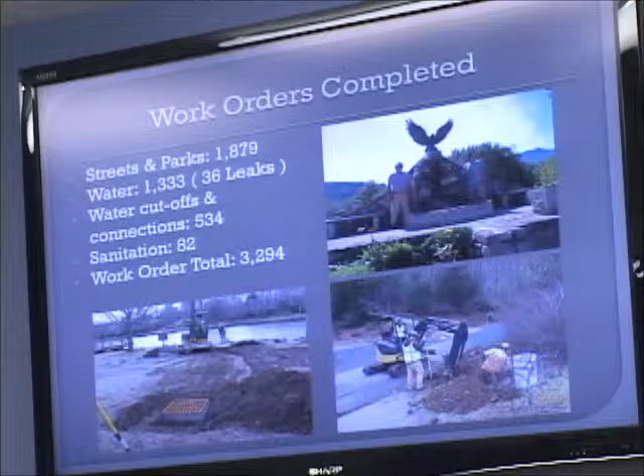Next is the Public Services Department report from Jamie Matthews. Evening, Mayor and Board. I'd just like to say our department had a very busy last 8 months, leading out of summertime, going into fall and winter. Our work orders completed: Streets and Parks completed 1,879 work orders for the past 8 months. Water was 1,333 with 36 leaks. Our cutoffs and connections was 534, sanitation 82, and our work order total for the 8 months was 3,294.

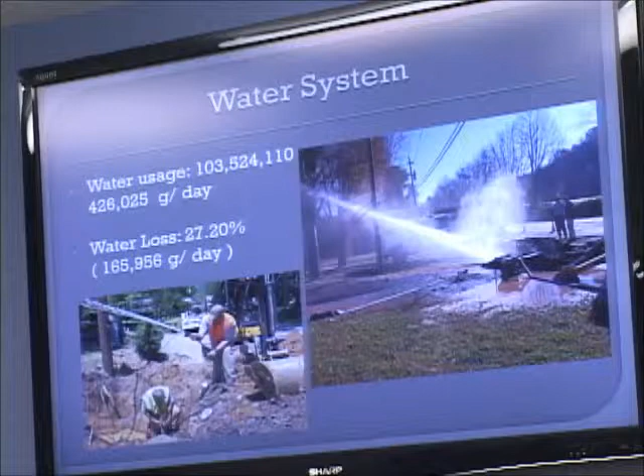Our water system usage: we used a little over 103 million gallons, being 426,000 gallons a day. Our water loss is a little over 27% at 166,000 gallons a day. On our water system projects, our GIS/GPS mapping, we've got the water lines complete, hydrants complete, valves complete, and we're 890 complete into 3,300 meters at this point. Our Hemphill water tank refurbishment, that was completed. I'd like to thank Southern Corrosion, Mark White, for taking care of that.

Also, we had Liquid Engineering come in and inspect all the tanks for this year, and they all turned out really good. No defects, anything like that. So it'll be about 6 to 8 years before we have to do that again on our refurbishment, and probably the next 3-4 years on inspections again. So we're good there. Carolina Heights water pressure assessment, that's moving along really good. We're actually going to start doing some digging within the next week or so, and try to have something done by about June. We got the permits and the okay back from the state on that.

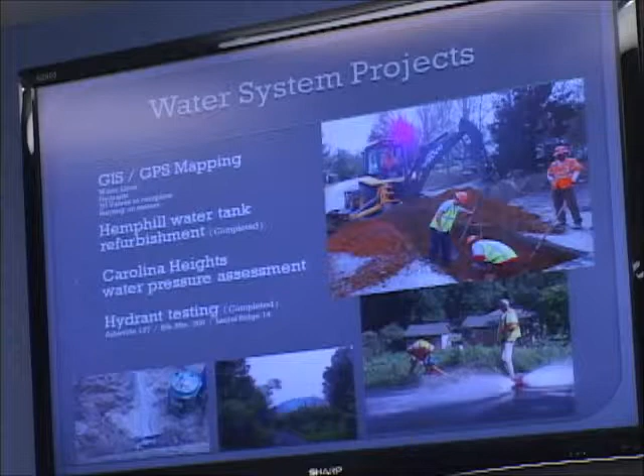We're going to do part of the work in-house and try to bid out what we can't do, which would be installing 2 hydrants and some release valves, and do some work on North Fork and Holly Avenue, put two 6-inch isolating valves in, things of that nature. So we're really looking good there. We hope that turns out good. Our hydrant testing we got completed. We did 137 in Asheville, 306 in Black Mountain, 14 in Laurel Ridge. Got that completed within those months.

On our infrastructure... Let me just interrupt if you would, and just try to explain to the folks what this Carolina Heights water pressure assessment is about, what it's trying to do and in which area of town. Obviously Carolina Heights, right, but that area that is north and west of the Montreat Road. Exactly. There's actually low pressure in that area, and it's been that way for years, and it really needed to be addressed. And we're hoping with the engineering we got and the staff we got that it is going to boost pressure to at least 600 residents.

And so we've already sent the letters out telling them if they need pressure reducers, things of that nature, they need to go ahead and get those installed. So it'll really be a big help, and it's really been a problem area, so it should help at least 500 to 600 people.

On our infrastructure projects and activities, what I did, I broke the town down into 6 zones, sort of like the way we push snow. And the goal is in the next 6 years to complete a lot of stormwater and ditching problems in town. We started on zone 1, and I'm glad to say it is already complete. Not only did the guys get the stormwater ditching, but we went ahead and trimmed the right-of-ways while we were in that zone. So that's complete. We'll start on zone 2. On storm drain repairs and replacement, we had several of them. We had several culvert replacements: Julian Drive, Gatchel, Mount Allen Heights.

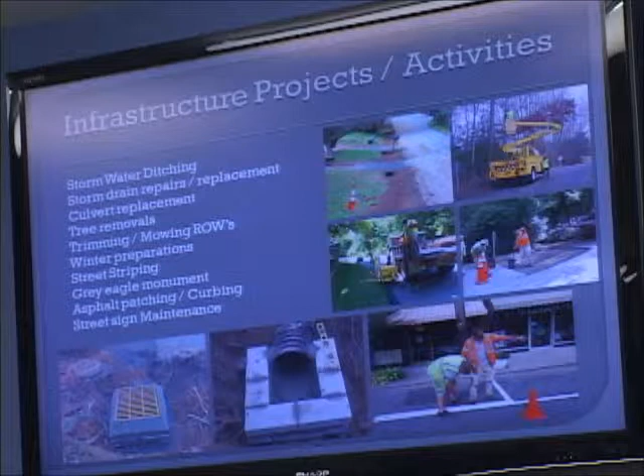Street striping we had budgeted for this year. JLS is, well, I'm overthinking myself. The street striping this year that we did, we got all the crosswalks, loading zones, handicap areas, parking spaces, public safety. We still have some of the parks, parking lots and stuff to do for this year, but we got a lot of that stuff downtown completed this year.

Grey Eagle Monument, we did a complete makeover on it, rebuilt the tank on it, water lines, put a new pump in it. We actually sealed it so it wouldn't leak. Redid the walking path behind it all the way out to Highway 9. Put geomatting down, re-graveled it so the grass can't grow back and it's easier maintenance to take care of.

Our asphalt patching and curbing, up till November we put out 52 tons of asphalt. We got that completed for last year. Street sign maintenance, we replaced 75 regulatory signs, brought them up to code and made them reflective. Got rid of a lot of the old painted signs.

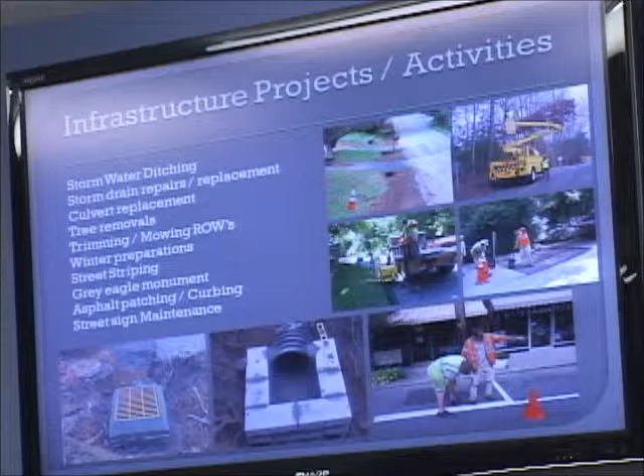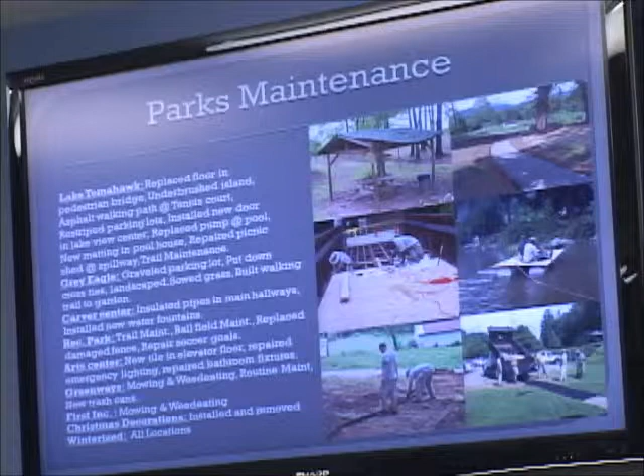On our park maintenance, Lake Tomahawk, we replaced the floor in the pedestrian bridge, which was a big job. It took several days to do, and I'd like to thank those guys for doing that. They've done a really good job. We underbrushed the island, of course. We asphalted the walking path to the tennis court, restriped the parking lots, installed a new door in Lakeview Center, replaced the filter pump in the pool, new matting in the pool house, repaired the picnic shed at Spillway, and of course we've done our normal trail maintenance.

Grey Eagle, we graveled the parking lot, put down cross ties, landscaped, sowed grass, and built a walking trail down to the community garden. Of course, we've done the geomatting and the pea gravel again so it'd be less maintenance. Carver Center, we insulated all the pipes in the main hallways and installed 2 new water fountains.

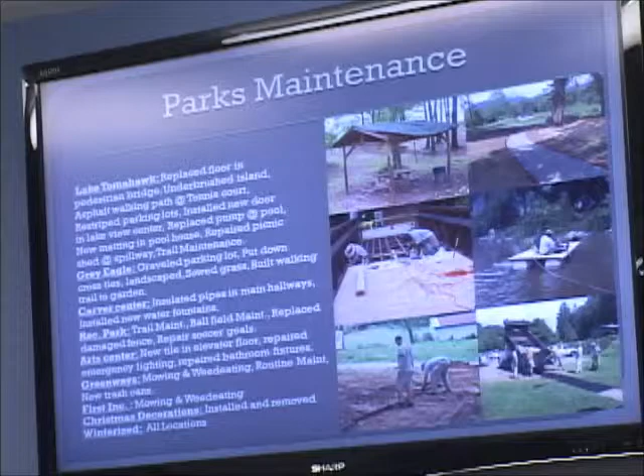Rec Park, this is something that I'm very proud of, and I'd like to thank the guys who worked very hard on it. During the storm damage, the walking trails along the river at Rec Park were completely gone. It washed them away. This crew, and I'd like to thank the Tollies that own Black Mountain Machine on Montreat Road. They had a bunch of shot rock beside our shop over there, and they gave us that rock, and we took a jackhammer on a track hoe and busted every bit of it.

And these guys hauled that rock, and they completely built those trails back within just a matter of days. I was really amazed by that and very proud of them, and I'd like to give them a pat on the back for that. If you didn't see it, you can't get an idea how bad it was, but it was bad. So they did a good job of getting it built back.

We repaired the soccer goals, replaced damaged fence, and at the art center we retiled the elevator floors, repaired the emergency lighting that wasn't working, and repaired bathroom fixtures that had gone bad. And of course our greenways, mowing, weed eating, and routine maintenance, and we replaced several trash cans and put out new trash cans. Our first mowing was completed for the end of the year.

Christmas decorations were installed and removed, along with the flags for Veterans Day, 4th of July, Memorial Day. And all of our locations were winterized: wellheads, pools, community garden, rec park, Grey Eagle Monument, places like that.

Administrative projects, asphalt overlays. I'd like to thank Lonesome Mountain Paving and Terry Coates. They got our lowest bids last year, and we got Hunting Lodge and Circle Lane repaved. They done a really good job.

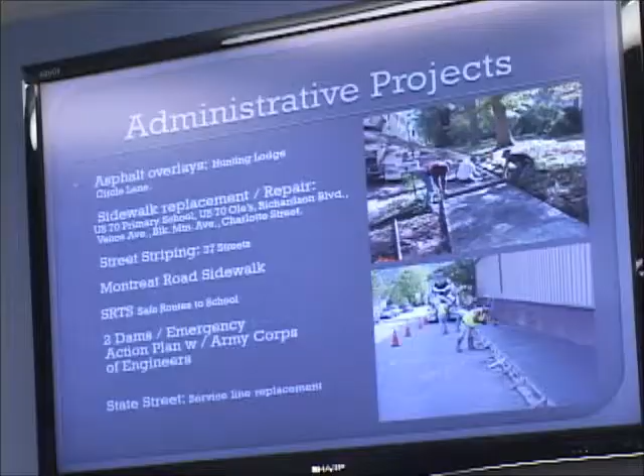Montreat Road sidewalk, we got the construction documents back. I'd like to thank Anna at Ron Sneed's office. She's done a really good job. We're getting the easement plats. She actually mailed it to the HOA, and that guy's received it. I've got to set up a meeting with him and Jesse Gardner tomorrow and go over the construction documents. Then we get the easement plat signed and sealed, and then we'll be building sidewalk.

And something I'd like to throw in on this that's good news is we met with DOT, me and Matt, Jesse, and a couple from DOT, Chad Bandy. Our next phase of sidewalk that we're going to put in, of course, all the way to the gate, DOT may have a requirement for us to put in curb and gutter, which of course is a lot more expensive. That could take a $400,000 job to over $1 million job. But here's the good part.

We have got a chance for DOT to give us $250,000 of funding to put in the curb and gutter, which would only leave us funding the actual sidewalk itself, and they would actually do the bidding and the construction. All we'd have to do is just fund our part of the sidewalk. So if that works out, that will be great, and we can move right on to the gate maybe and get a lot more lineal footage done, considering how it turns out. So we hope that turns out good news.

On the Safe Routes to School, Jill Edwards really, she's the one that really took over this project. She's done a great job with that, and so I give hats off to her. She's really worked hard on this project, and it'll be going out to bid tomorrow. It'll run about 3 weeks. It'll come back, and the way I understood it, the board will have to vote on and approve the lowest bidder. Mike Callaway with DOT will probably be working over, because it being a grant, it's really strategic stuff, and it's really documented very well, and he'll probably be overseeing the materials and the time that goes into it. So look forward to getting that one done.